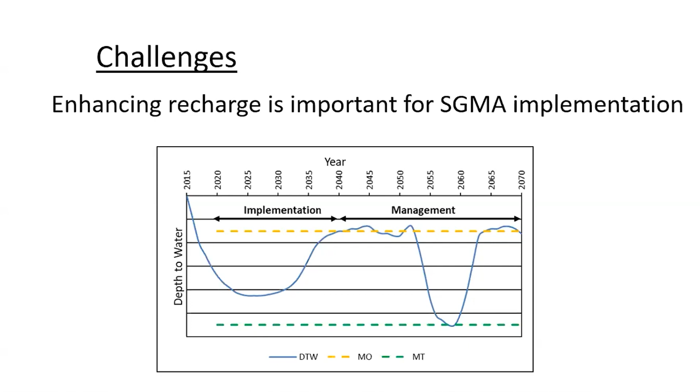And then there may be periods in the future when there's drought where water levels will decrease again and then have to be brought back up to that measurable objective. And enhancing recharge is going to be really important to get those water levels back up there. So that's some of our interest in managed aquifer recharge, is to help with SGMA.

So review of the groundwater sustainability plans generally shows that the smaller subbasins, and maybe some of those are the medium priority basins, have smaller groundwater budget deficits. Some of them are less than 10,000 acre feet per year. And on the other end of the spectrum, some of the large critically overdrafted basins can have more than 100,000 acre feet per year groundwater deficit at the beginning of this implementation period. And those numbers are projected to be even larger if you factor in the effects of future climate change.

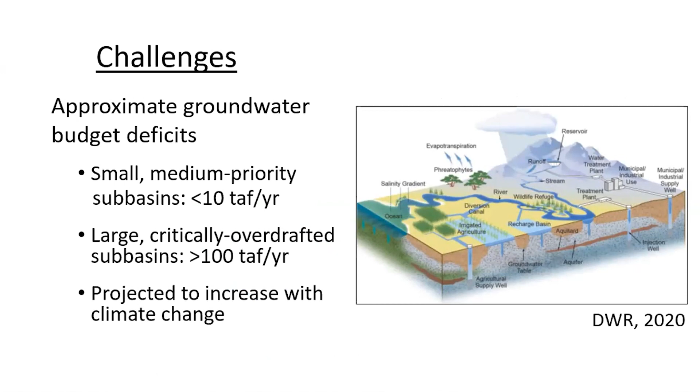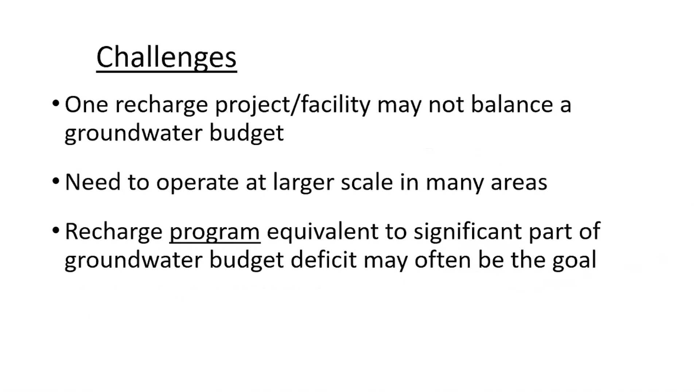So given the size of those groundwater budget deficits, one recharge project or facility probably isn't going to balance a groundwater budget. And you're going to need to think on a larger scale and operate on a larger scale in many areas, and think about recharge programs instead of projects that are equivalent to a significant part of that groundwater budget deficit.

Not surprisingly, appreciable amounts of water and land are going to be required. And there are going to be some other resources and assets and considerations that would be required as well, and we'll get into some of that in a minute. But one party may not control all of the components necessary for success. And interests and concerns among those involved parties likely are going to vary and maybe even conflict in some situations. And this next slide will give you a little bit of a sense of what I mean.

So success for a MAR project or program is going to depend upon aligning the parties' interests and considerations. And there are going to be many of them. Here are some potential examples: water needs, land uses, infrastructure commitments, regulations, and jurisdictions. And you're looking for that sweet spot, that overlap, where you can satisfy all of these needs.

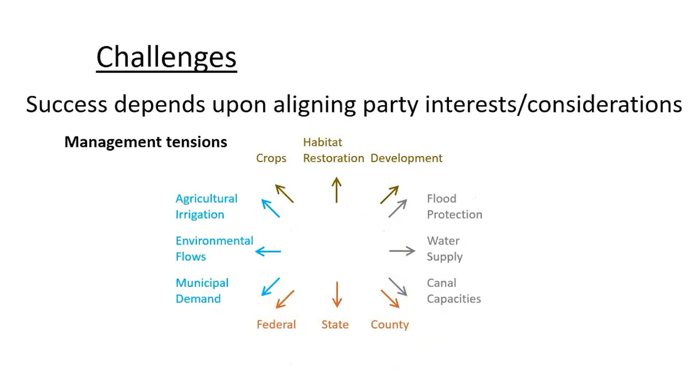So there are going to be management tensions as a result. There are going to be different demands for the water and for the land and for uses for the infrastructure, and maybe a variety of jurisdictions and regulations that have to be worked through. So multi-benefit projects is sort of the holy grail of many of these MAR programs, where we're looking for a way of sort of holistically looking at all of the needs and aligning the interests.

So the idea with a multi-benefit project, and I should mention that Gary Bardini and Tim Washburn from SAFCA have spoken about this concept in this area at length. We might be able to talk about more of it during the Q&A period. But the concept in general, or in short, is that within the context of multi-benefit projects, you can focus on mutual interests and arrive at solutions.

So I contend, and many in our group contend, that it's important to seek opportunities to align those interests and motivate participation. And our experience in the work we've done so far shows that the requirements are going to be in addition to technical competence. You're going to be looking for entrepreneurism and collaboration. You're going to want some people that have insights into organizational behavior. So the needs of the team are going to be broader than just a technical skill set.

Some of you may know of Malcolm Gladwell's book, The Tipping Point. He discusses many of the different personality types and the functions that they serve when you're seeking to implement some sort of a project for the greater social good: the connector, the maven, the salesperson. All of these types of people, I think, have a place when you're trying to develop a MAR program.

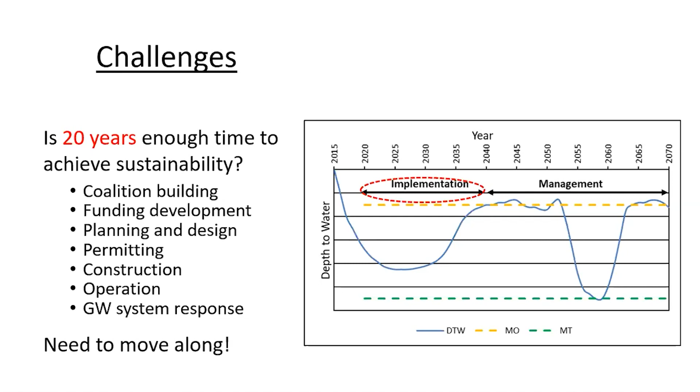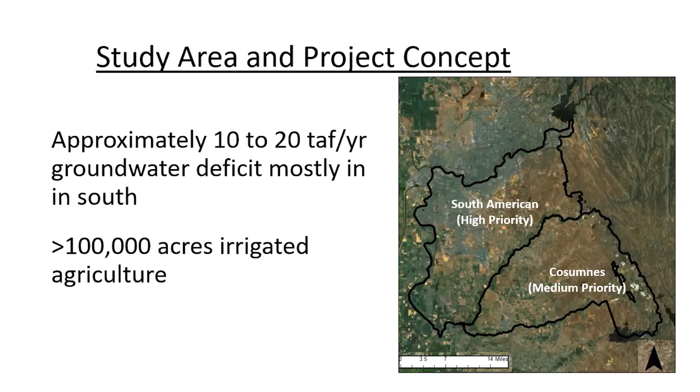So the study area and project concept. So it's south of the American River. It's the South American and Cosumnes groundwater subbasins. Zooming in on it, the South American is a high priority basin, so its implementation period began in 2020, and the Cosumnes is medium, so it's 2022. The groundwater budget deficit is approximately 10 to 20,000 acre feet a year. It's mostly located in the south. There's over 100,000 acres of irrigated agriculture in this area.

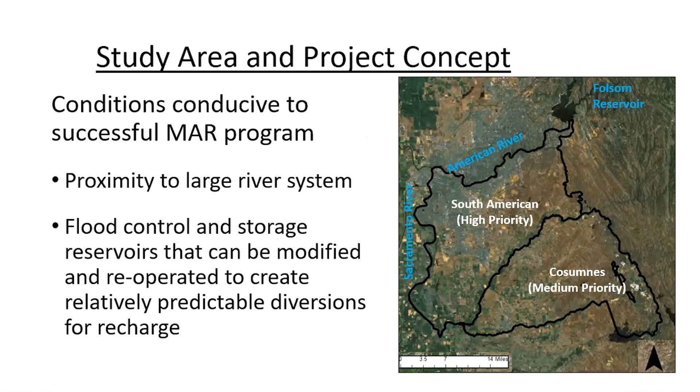And there are many conditions that are conducive to a successful MAR program. The first being proximity to a large river system. The second being a flood control and storage reservoir system that can be modified and reoperated to create relatively predictable diversions for recharge. So there's Folsom Reservoir in the top of this photo. That's part of that system. There's also a canal, the Folsom South Canal, that's capable of conveying significant diverted volumes to recharge project areas.

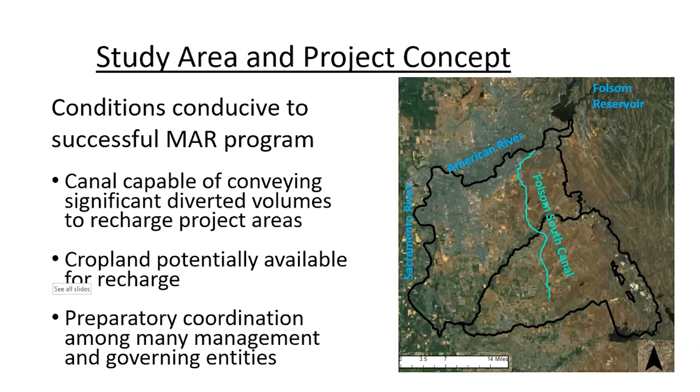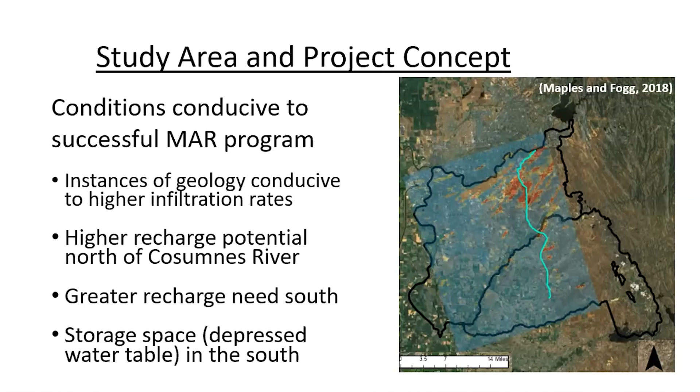But these red areas south of the American River are what Graham has been discussing for many years now, these incised valley fill deposits, in this case, paleochannels from previous courses of the American River. There's higher recharge potential in this area north of the Cosumnes River. The Cosumnes River is the dividing line between these two subbasins. But there's greater recharge need to the south, and that's actually where the storage space is for recharging the water. There's a depressed water table in that area.

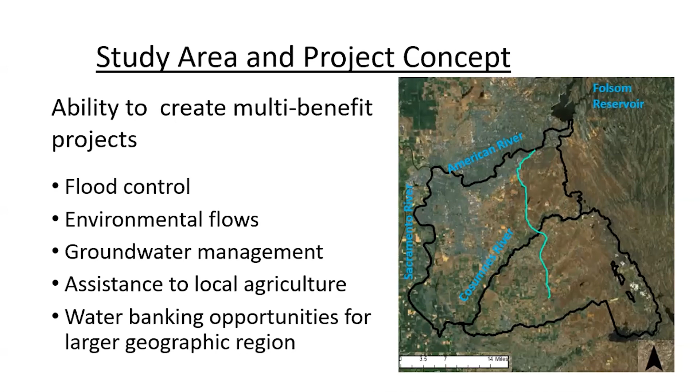There's also the ability to create multi-benefit projects. Some of them are flood control, supporting environmental flows, supporting groundwater management, assistance to local agriculture, and some water banking opportunities for the larger geographic region. Many parties are included. I think I've included everybody. If I haven't, I apologize. So here's one of the acronyms that I'll use today, FIRO-MAR.

So this is a concept that Gary Bardini and Tim Washburn of SAFCA have spoken about many times. The idea is to modify the upstream reservoirs in the American River watershed to provide additional flood storage when extreme rain events are forecasted. So forecast-informed reservoir operation, that's FIRO.

And that will free up space for wet year storage down in the Folsom Reservoir, creating a net improvement in flood control. And then using the Folsom South Canal, that water can be wheeled or conveyed down to recharge areas. Calculations done to date suggest that maybe 125,000 acre feet might become available through this approach in 4 out of 10 years, so an average of about 50,000 acre feet a year.

Considering the recharge projects that we might implement, we need to think about things at a site-specific level. And one thing that we all agree on is that the projects must fit into the pre-existing land uses. So we need to think about the activities and the conditions and what space and timing considerations and constraints they might impose. Then you also have to think about the subsurface. There can be stratigraphy that could impede infiltration.

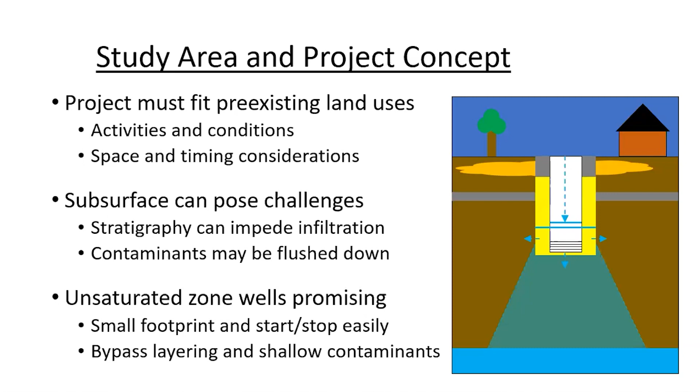The idea here is that the unsaturated zone wells have a small footprint. They can be started and stopped easily, and they can be tens of feet deep. I'm going to show you a 50-foot deep one in a while. And therefore, they can bypass quite a bit of the layering and the shallow contaminants in being effective recharge facilities.

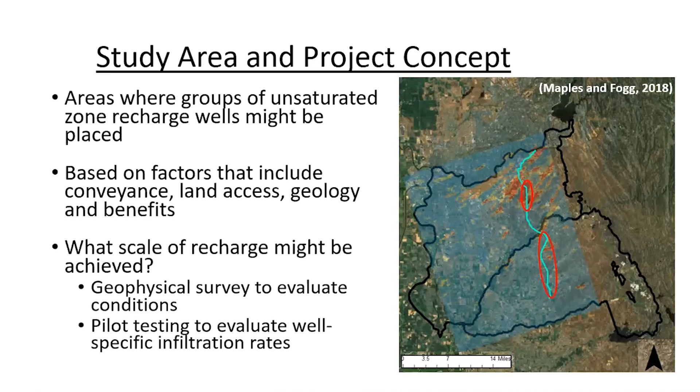So let's look at a couple of sites. As I said, we're focusing on unsaturated zone recharge wells, and we've looked at a site in each of these two subbasins. Site 1 is up in the South American, site 2 is just south of the Cosumnes River in the Cosumnes subbasin. So different approaches at each site based a little bit on philosophy and quite a bit on logistics and funding.

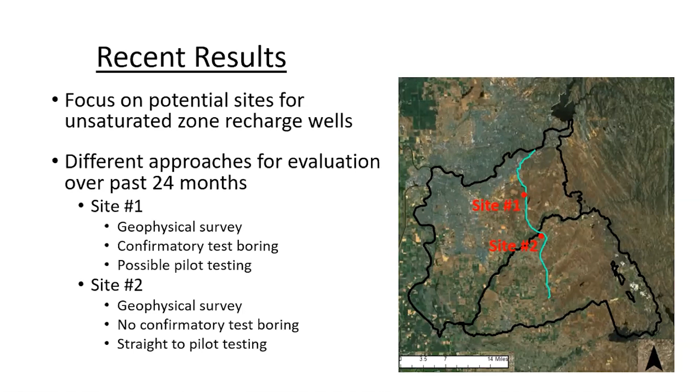So in the first site, we did a geophysical survey, then performed some confirmatory test boring. And we had the possibility of doing some pilot testing that, for reasons that'll become evident, we didn't do. The second site, we did a geophysical survey, didn't do the confirmatory test boring, and went straight to the pilot test. So let's take a look.

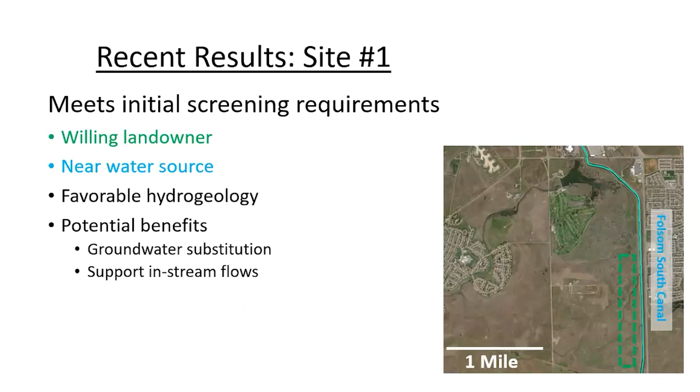So the initial screening was met for both of these sites. There's a willing landowner, it's near a source of water, the Folsom South Canal. The hydrogeology was favorable, and there were some potential benefits to doing the recharge. So in terms of the favorable hydrogeology, here we're looking at some of those results from Maples and Fogg that I flashed up before at a larger scale.

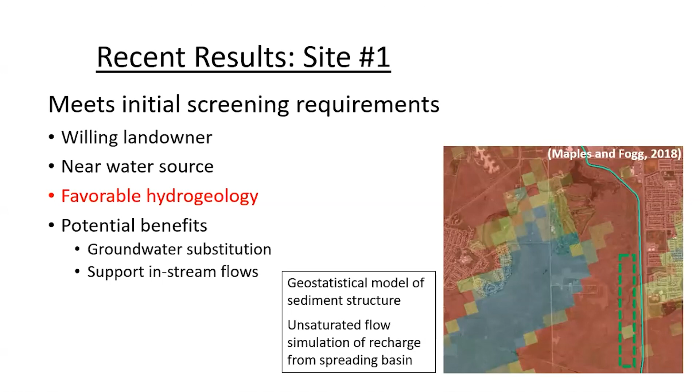Now we're zoomed in. They're based on two pieces of work done by different graduate students in Graham's research group. First, Casey Meirovitz, 15 or so years ago, made a geostatistical model of the sediment structure. Steve Maples then came along and did unsaturated zone flow simulation, where he simulated recharge from spreading basins at the land surface and color-coded the results based upon what he found from that modeling work.

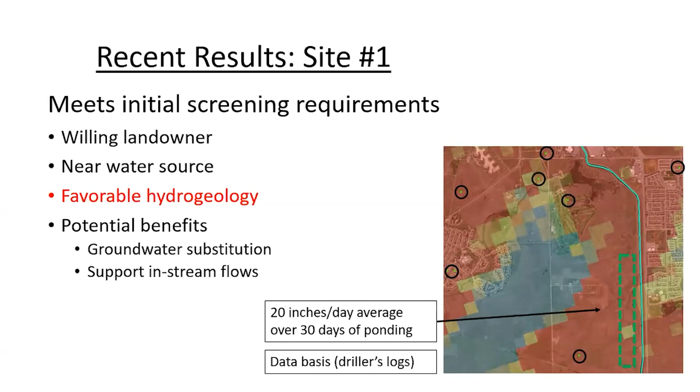So the red indicates 20 inches a day average recharge over a 30-day period of ponding. There's also a gravel pit nearby, so some more favorable indications of favorable hydrogeology. So we did a TEM survey, time domain electromagnetic survey. That's Ahmad Behroozmand on the ATV pulling the instrumentation through this field.

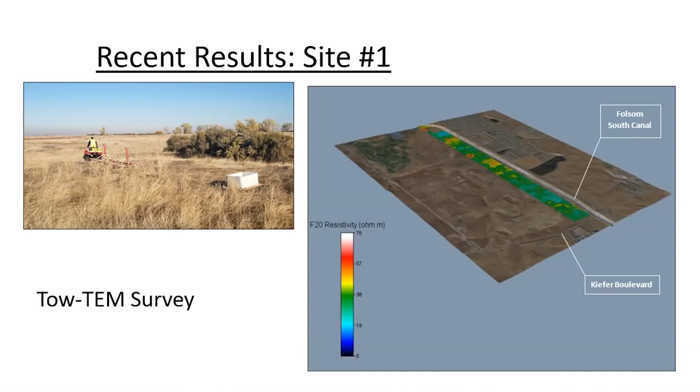And you can see in the right-hand plot here that we did about a 2-mile stretch parallel to the Folsom South Canal. And you'll see some of the other dimensions of it in a moment. But that's what we did. And then Ahmad inverted the data. He did the modeling to interpret the data that came back to give us this block of geophysical survey results.

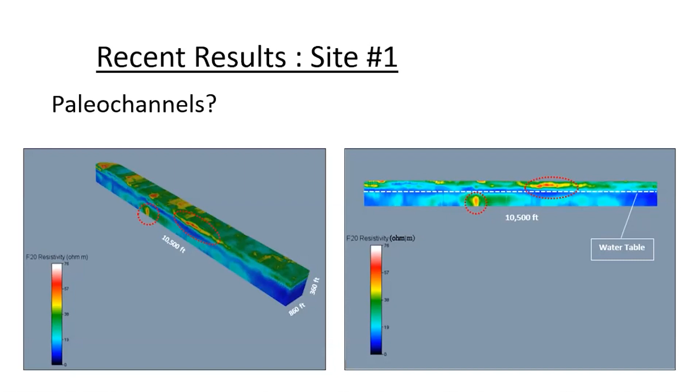And there are these very hot zones, both above and below the water table. More resistive, higher resistivity numbers, these hot zones, can indicate coarse grained sediments. You need to be mindful of soil moisture content and water quality, which we'll talk about in a minute. But we thought, hey, maybe these are coarse zones and maybe they're paleochannels.

So we asked for support from DWR's Sustainable Groundwater Management Office. They have the Technical Support Services program, and they were willing to help us. So we located some test borings in order to sample as much of the variability of the geophysical results as we could. We had some limitations related to site access and biology.

And we were hoping to be able to answer some questions about what are the effects of moisture content in the unsaturated zone, variations on resistivity. What's the effect of the sediment type on the resistivity? How can we interpret this geophysical data set?

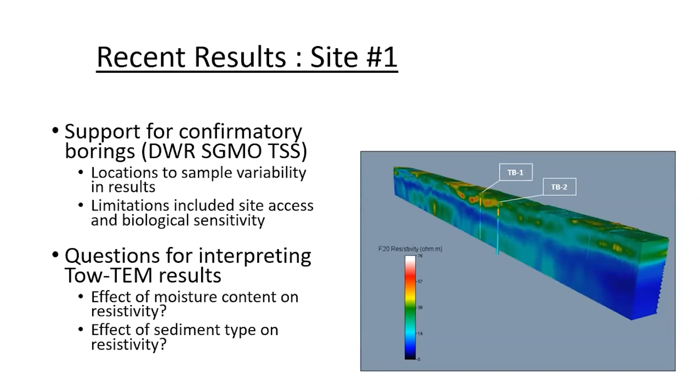So DWR contracted with Cascade Drilling. A sonic rig was brought out to the site for 2 weeks this past September. And we did some continuous coring with a 4-inch barrel. Bryce Russell from DWR did a lot of the logistical organization and then was there on site for 2 weeks doing the coring and the logging of the cores, and Bryce was supported by Bill Brewster, Steve Springhorn, Tim Godwin

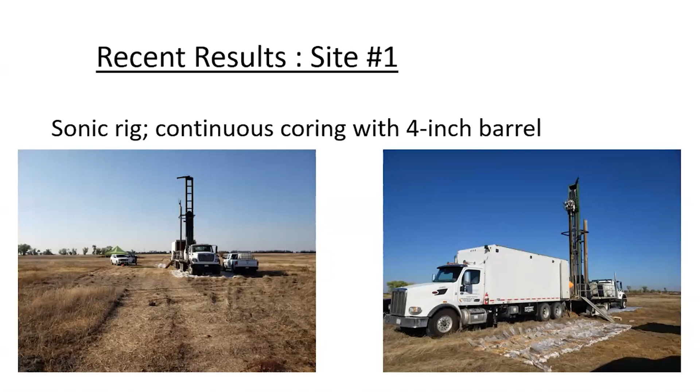from DWR's SGMO office. I spent some time out in the field with Bryce, 1 day on each hole. He was 5 days on each hole in the hot sun. And I wanted to get some familiarity with the logging and the results so that I could take it to the next step and take a look at the facies.

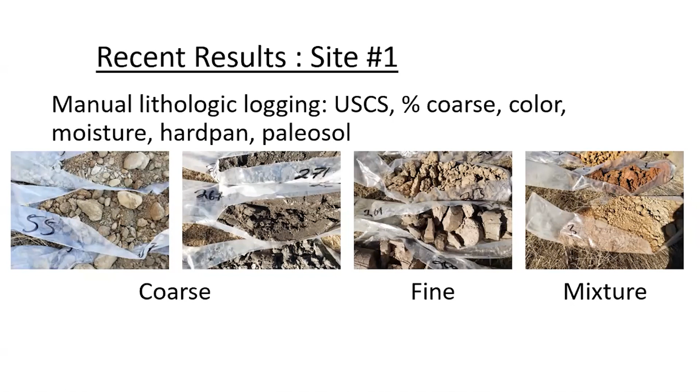But here's another slide about what Bryce did. He manually logged these holes according to the U.S. Unified Soil Classification System. Looked at the percent coarse, the color, the moisture, noted hardpan and paleosol. We then did a preliminary identification of the facies based on the texture and came up with these classifications.

So the channel deposits were the sand and the gravels, high percent coarse, low percent fines. The levees were fines with some sand. The overbanks had no coarse material in them. And then there were these debris flows, which were mixed and poorly sorted.

And here are some plots of the way those groups plot out. So the levees are in brown, so low percent coarse. The channels have the high percent coarse. The debris flows are all over the place in orange, and then the overbank had no coarse material in it.

So then we wanted to correlate the lithology information with the resistivity information. And we noted that it could be complicated for 2 primary reasons. First, resistivity varies with sediment characteristics. Resistivity goes up as grain size goes up. It can go down as moisture content goes up. It can also go down as total dissolved solids goes up in the moisture contained in the soil.

Also important to think about is the fact that there are differences in the scale of the data support. Resistivity is an integrated response in 3 dimensions. The values are for discrete model layers in the inverted model, starting at about 1 meter thick at land surface, and down at depth at 360 feet, they were 8 meters thick. Compare that with the sediment logging, which was one-dimensional but continuous and logged on a 1-foot interval. So different scales that had to be contended with.

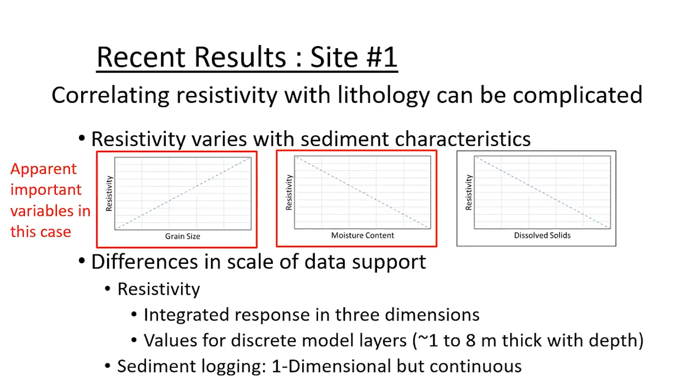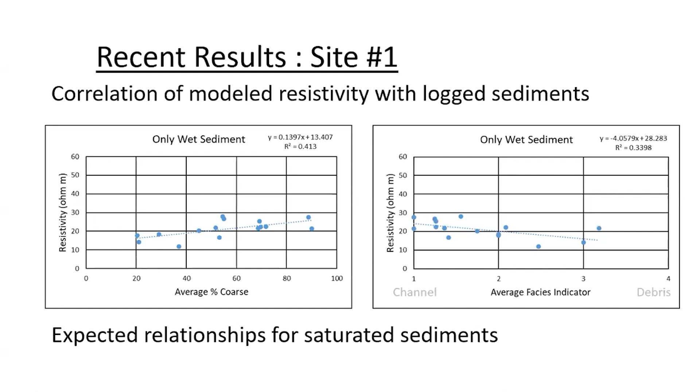Apparently the most important variables in this case with respect to the resistivity were the grain size and the soil moisture content. We didn't think there was going to be much difference in dissolved solids at the scale we were investigating the situation. So here's some plots of resistivity versus percent coarse and the average facies indicators in the saturated zone. And this did what we expected it to do. Relationships are as we expected: as percent coarse goes up, as grain size goes up, the resistivity goes up.

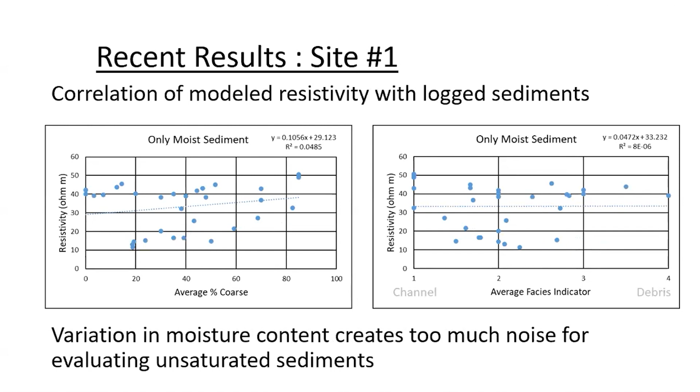Compare that to what was going on in the unsaturated zone, where there's a lot more scatter, and it's really hard to interpret these data. Variations in the moisture content really created too much noise for us to evaluate them. And it's not surprising when you think about the fact we have an 180-foot unsaturated zone, wet and dry seasons, variations in sediment properties. You're going to get pulses and pockets of moisture.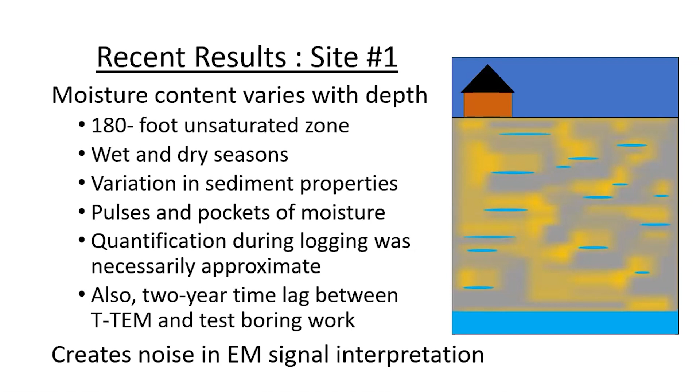The quantification during the logging in the field was also necessarily approximate. And I'm not sure that it would have made sense to try to get any more exacting in the field with respect to the water content, because there was also a 2-year lag between the time we did the tTEM and the time the test boring was done. So if you plot the resistivity versus facies for the wet sediments on the left and the moist sediments on the right, you can see the difference in the scatter in the data.

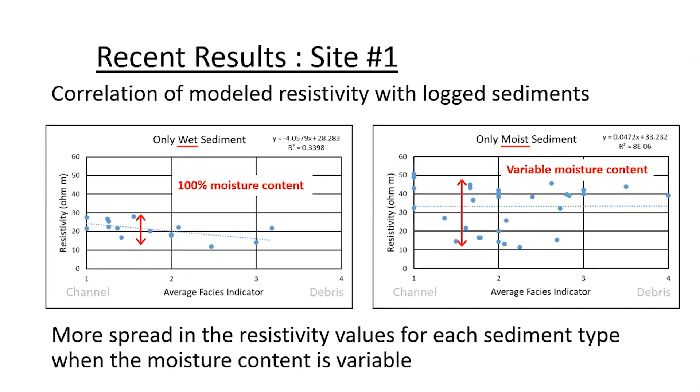We are able to model the resistivity, come up with a correlation between the resistivity and the fraction coarse for the saturated sediments that's below the water table. And if you look, the plot on the right is sort of a typical plot of modeled versus observed values. It looks pretty good, but there's this whole piece of the resistivity spectrum that we see in the unsaturated zone, which is left unaddressed. So what to do?

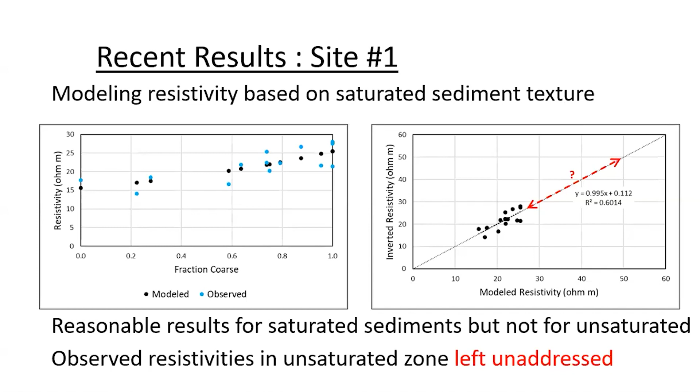Well, visual inspection, some people might suggest it's not that rigorous an approach, but I would maintain that the eye takes into account spatial correlation of similar values. And you can run through various concepts in your mind as you're scanning through a data set and actually do quite a bit. And here I've peeled back on the left the data block of geophysical data to show you the facies identified in the borehole for test bore 1. And then on the right hand, come forward in the data block, and I've put the geophysical data that's most proximal to test boring 2 and its lithology.

And what you see is that these hotter values in both zones, being the saturated zone and the unsaturated zone, line up well with the channel deposits. There are other deposits in there as well, but the geophysics, as I said, and the soil borings are at different scales. So I would maintain that if it looks like a channel, it actually may be a channel.

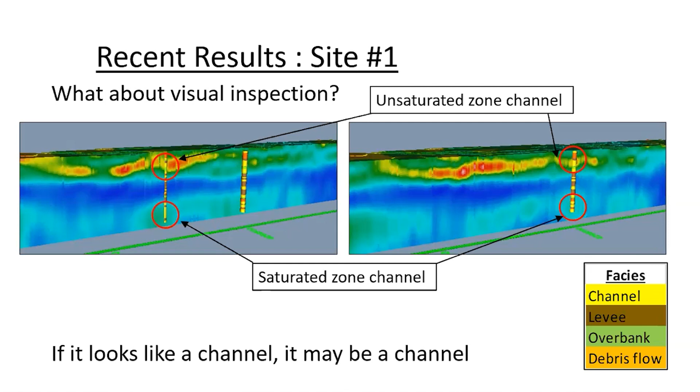Same thing for this impeding layer, this blue layer. It lines up well with the levee deposits as they were preliminarily identified. They may be actually overbank deposits. It was a preliminary identification based just on the texture. And when you think about the spatial extent and the geometry, it's probably more appropriate to call them overbanks. But anyways, we're able to see some things from the geophysics here pretty clearly.

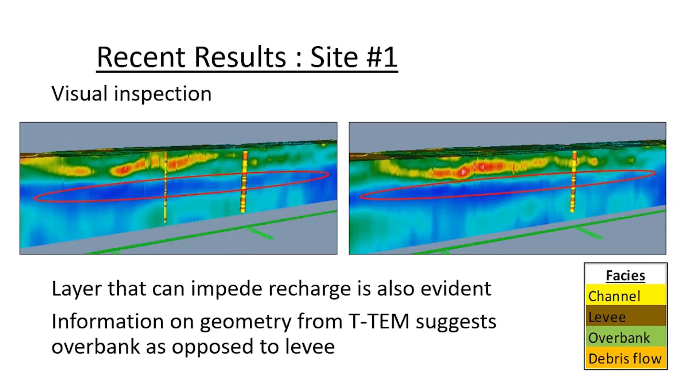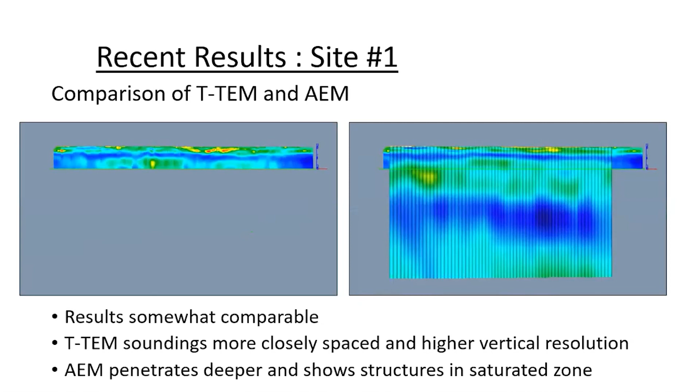Final technical slide for this site. There was also an AEM, airborne electromagnetic flight, that went right through our data sets. We're able to take a look at the two sets of data together, and they're somewhat comparable. The tTEM soundings are closer together with higher vertical resolution. You get more detail in terms of what's going on, but you can see quite a bit of it in the AEM. The AEM, on the other hand, penetrates deeper and shows structures in the saturated zone.

So this site may not be the best for recharge. There's no apparent conductive pathways for fast transmission to the saturated zone. There's also a significant lift to pull water up from the Folsom South Canal at this location. It's pretty well incised into the land surface. But one might be able to factor stormwater capture into the planned housing development in this area. That's something to think about.

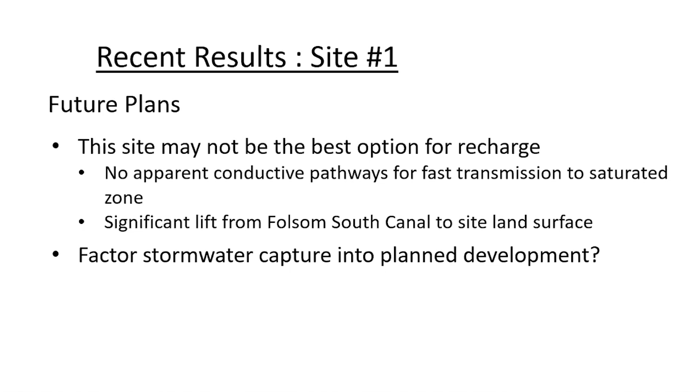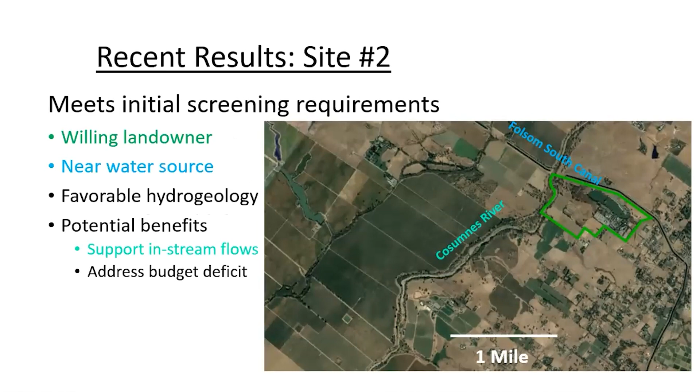Okay, site 2, same idea. Willing landowner. It's near a water source. It's got favorable hydrogeology and also potential benefits, which include supporting environmental flows in the Cosumnes River. We've got the geostatistical support that shows the geology is favorable. We've got our nearby road cut, thanks to Chris Bonds from DWR. He took a picture over on Dillard Road when he came out to visit us in the field one day.

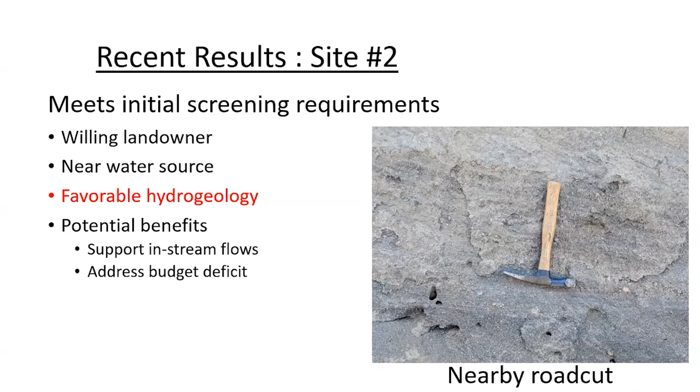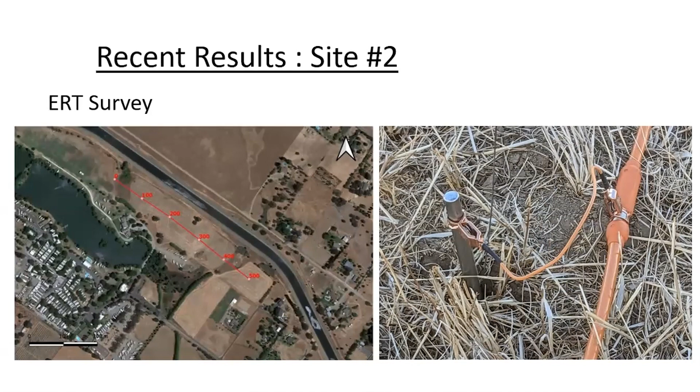So here we did an ERT survey, electrical resistivity tomography. And this was done by Ahmad again, but more recently, Gordon Osterman and Scott Bradford from the USDA are doing some geophysics out here. And here are the results.

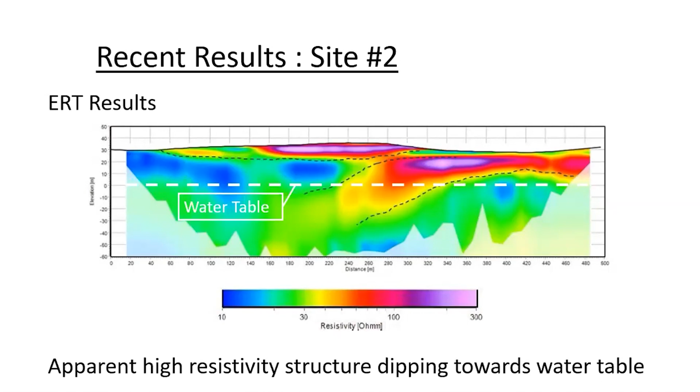Now, this is a log scale, whereas the other ones that I showed were at a linear scale, but the red in the unsaturated zone is the same value. So you've got some good higher resistivity material here, and you even got material that's even higher, that purple zone in the core there. And we see this dipping structure into the subsurface.

So we decided to put a well in here. And Steve Julian and Mike Wakeman at OHWD led that effort. And this is what the well looks like in terms of its construction. It has both an injection casing and a monitoring well casing, both of which are instrumented with pressure transducers.

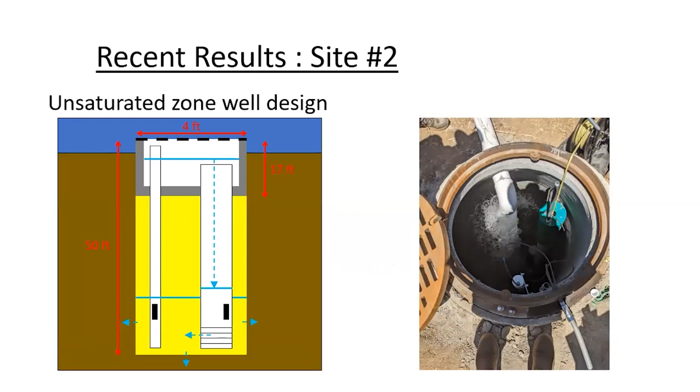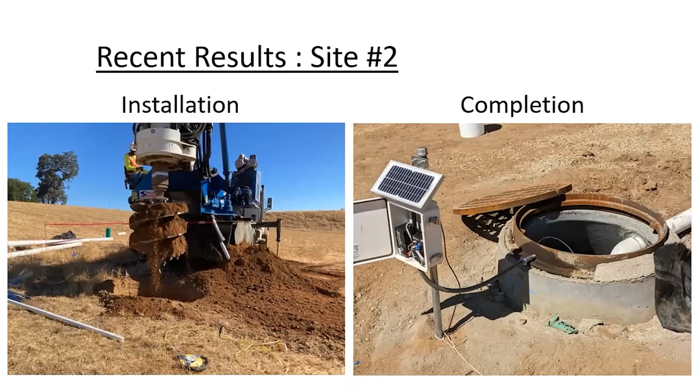Here's the installation, which was done by Travis Pacheco and Torrent Resources team. And then the instrumentation and the telemetry were done by Jeff Walker and Andrew Calderwood and Laura Folia from Larry Walker Associates. We didn't log this hole as it was being installed, but we did look at the cuttings, which were organized from shallowest to deepest afterwards.

And I saw these gold flecks in there, and knowing that this was near where gold was first discovered in California, I greedily got out my best Tupperware and panned out the gold flecks, and they turned out to be pyrite. So no gold for me, but pyrite is consistent with the depositional environment that we would expect here, some channel deposits.

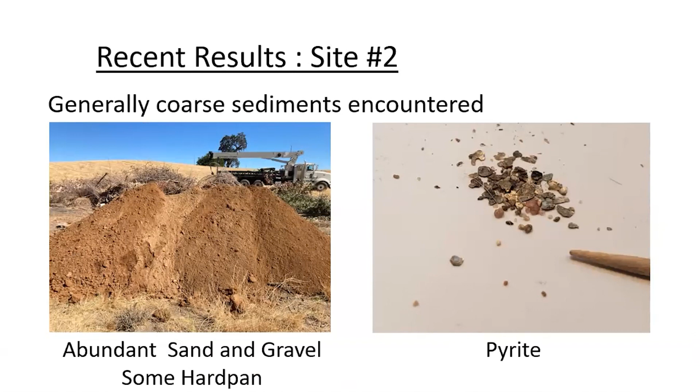So we used a temporary water source. I guess I should mention that this well was never intended to collect surface water because there are prohibitions in Sacramento County for doing that. So that's why the culvert sticks up above the ground a couple of feet. We used a water supply well that's located about 60 feet away and have a transmission line to bring the water to the well, and we recharged it.

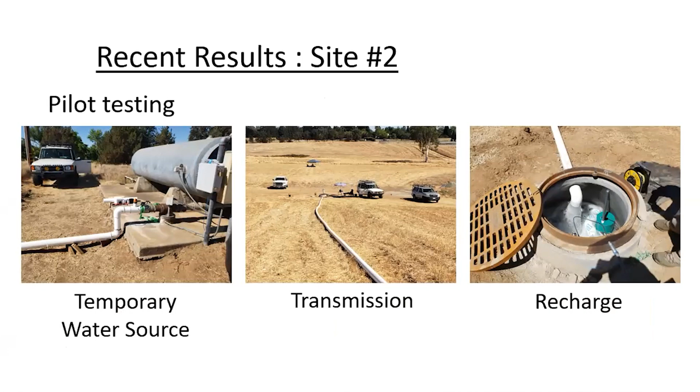And we did a short test at about 380 GPM. And if you had done that 24/7 for 6 months, which is the way we're thinking these wells might be operated, you'd get about 300 acre feet in the ground, and you need about 30 to 70 wells to address the basin deficit. And there was lots of room for additional injection based upon the space in the injection casing.

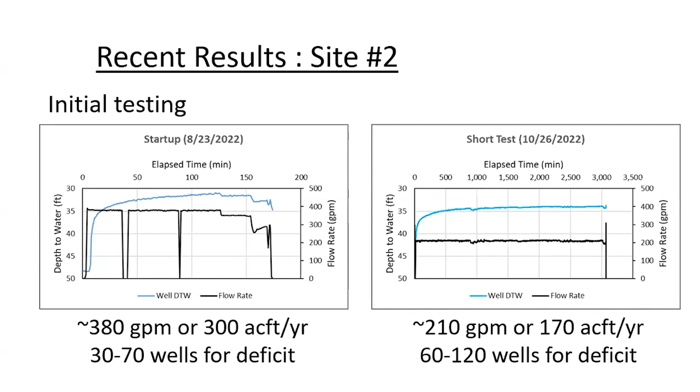Then we did a longer test at a lower rate, but it was lower because we couldn't use all of the supply from the well for 2 days. But again, good results in terms of the ability of the system to take water. And there wasn't much head loss. We have these transducers inside and outside the injection casing, and not much head loss at 380 GPM across the screen. So all indications are we could put a lot more water in the ground here.

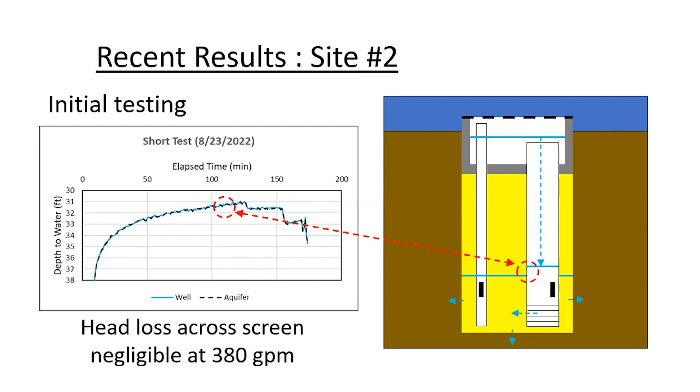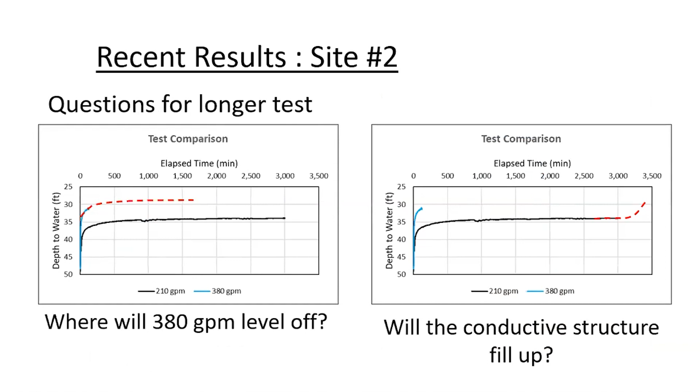We're just not sure how much more. We're not sure where the 380 GPM would level off, and whether if we ran longer, whether it would fill up the conductive structure. We did get a third unexpected test, though. You remember that the levees along the Cosumnes River broke in December on the 31st, and there was a flood. And here you can see the hydrograph.

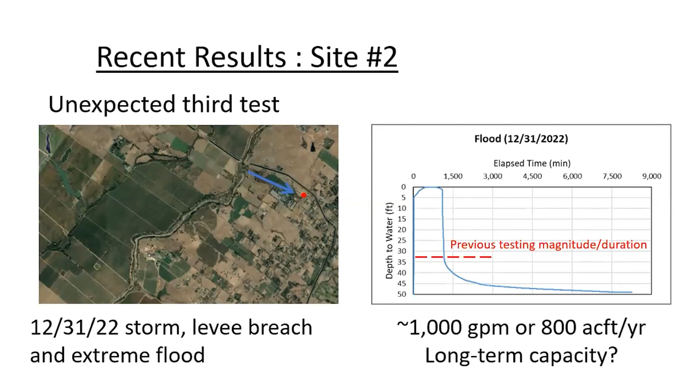I started getting data coming to my phone saying that the well was operating. Well, the injection well was operating, but I had data that was saying the pumping well wasn't operating. Well, that's because it was coming from a flood event. And you can see the magnitude of this flood event and the duration of it relative to the previous testing. My best calculations, I'm still working on this, but I think it was flowing at about 1,000 GPM into the subsurface at that point. So we have these 3 tests that range in terms of the volume of water from 1 to 17 times as much water.

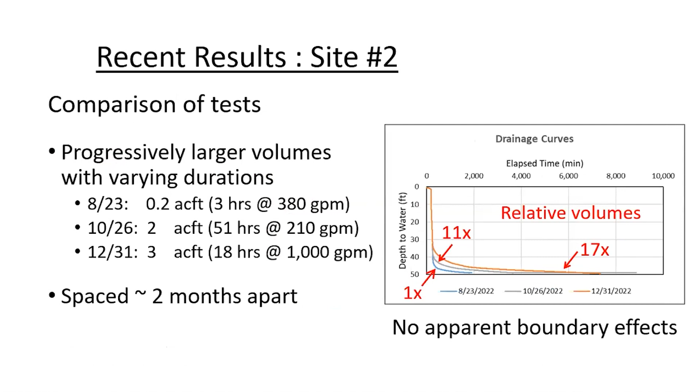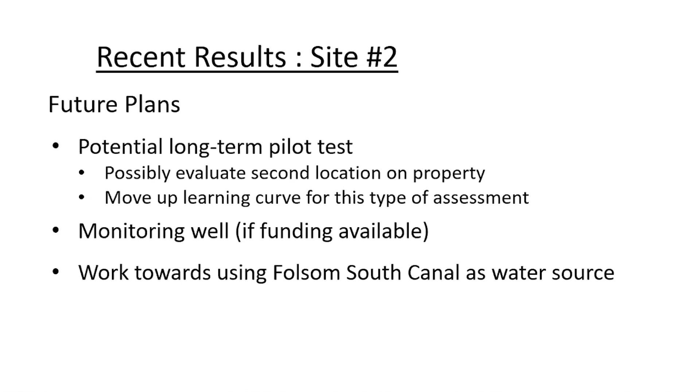And future plans here are to do a longer term pilot test, possibly evaluate a second location on the property, and move up the learning curve for this type of assessment. Maybe we'll get a monitoring well in at the water table to see the mound up of water, if we can get some funding for that, and ultimately work towards using the Folsom South Canal as a water source. So, takeaways.

So far, I've been presenting quite a bit of technical information, but a lot of work has gone into accessing these sites and thinking through how to scale things up. So some of what I have to say is sort of our group knowledge and isn't as technical.

So, first, it's very important to think broadly and deeply about program development. How do you align party interests and motivate participation? How do you overcome challenges, impediments, and meet the varied needs of a MAR program? And importantly, create project momentum. Many suggestions will be made and only some will come to fruition, but it's really important to exercise that marketplace of ideas and maintain project momentum.

Fewer opportunities than appear on the aerial photographs may actually exist because that initial screen is quite tight: proximity to conveyance, willing landowners, compatible land uses. So I'd suggest that you try to make use of every site that may be viable. It's going to take many sites to reach program scale, and not all the sites are going to be perfect fits. So if the hydrology is better than poor, I'd suggest considering using it to add to your recharge program.

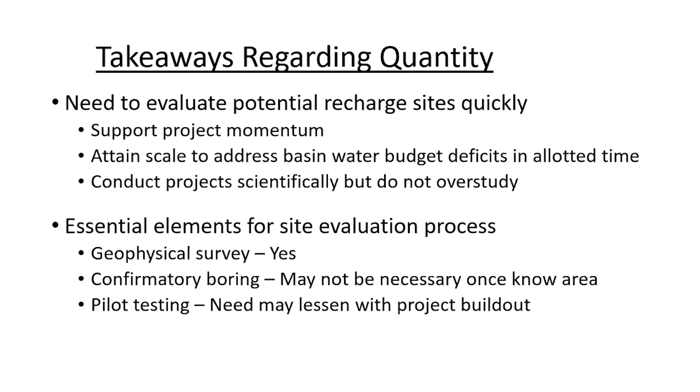So then in terms of the technical takeaway from all the technical information, we have this need to support doing these projects quickly in order to support momentum and attain scale. And I think it's important to do projects scientifically, but not to overstudy them. And with respect to the essential elements for the site evaluation process, geophysical surveys are a must. Confirmatory boring, maybe it's not necessary everywhere once you know an area. And pilot testing is important, but maybe as you move up the learning curve on project build out, the need for that could even lessen as well, as you're really just trying to get to scale as efficiently as possible.

Okay, a couple of comments on water quality. So we're talking about quantity so far. Quality really matters. It's a complex topic. I'm going to give you some thoughts, really just points for beginning a discussion. So there are many considerations. Are some of them going to be exclusive? There are some cases where there's going to be a tension between maximizing quantity and protecting water quality, and there may be some difficult trade-offs that need to be considered. So there might not be a perfect solution.

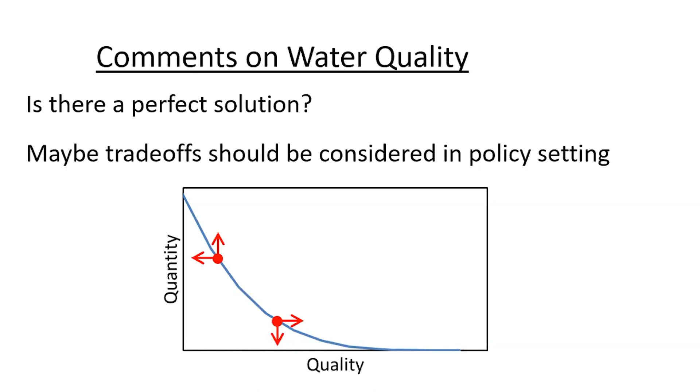Here, if you think about the trade-off curve between maximizing quantity and protecting quality, if you look at a point on this curve, if you go to the left, you could be maximizing quantity by taking as many sources of water, as much water as you can. Maybe some of it's going to have a variety of qualities. On the other hand, you could really be protective of quality and put a very tight screen on all sources of water that you use, but then you're not going to get as much water in the ground. So there's a tension here.

You always have to think about the source water quality. The conditions are going to vary, and timing and hydrologic event might be something to think about. For instance, if you're thinking about surface runoff in an urban environment, you might not want to take the first couple of flushes of water at the beginning of the wet season. That's probably going to have more constituents in it than others.

If it's materials that are adhered to suspended solids, that might be readily addressed. If it's dissolved constituents, but the constituent has a high maximum contaminant level, the water might be acceptable in many cases because the concentrations are low. It's these dissolved constituents with low MCLs, or guidelines even, because they're emerging constituents that don't have MCLs yet, where we may have some problems.

So planning horizon matters. If you're thinking about short-term impacts from washing down legacy contaminants from the unsaturated zone versus the longer-term benefits of doing the recharge, and maybe putting clean water into an area that has water quality that isn't as good or is projected to get bad if no actions are taken. I'm thinking about things like nitrate and total dissolved solids. There's a balancing act to go on there. This is in the realm of policy.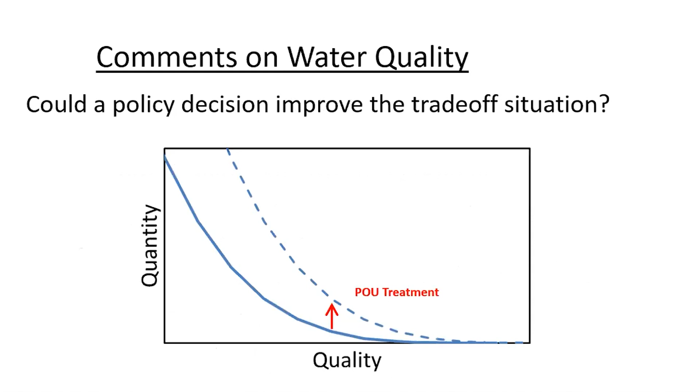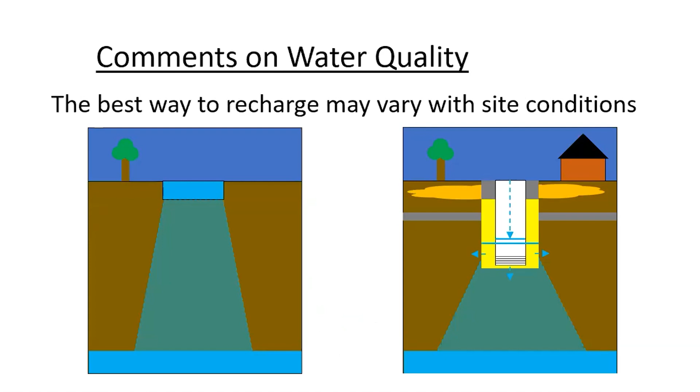There are some concerns. Permitting of this type of a well isn't accepted everywhere, and one of the concerns is injection of untreated surface water. And here, I think the point to consider really might be, what is the travel distance through the unsaturated zone before you get to the water table?

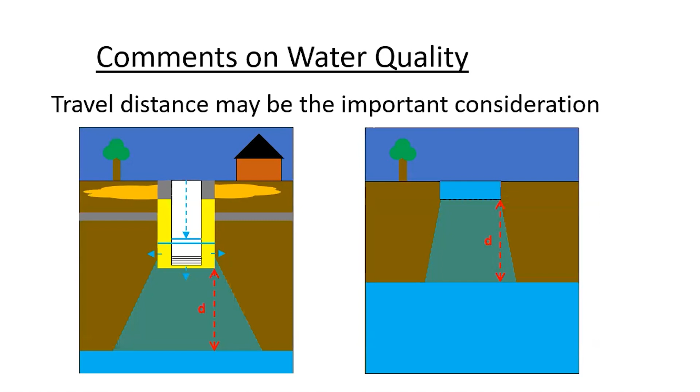So you could have a situation where you have a pond accepting untreated surface water that has the same travel distance to the water table as a recharge well. The recharge well is in an area where you couldn't put a pond. You still have what is considered in the pond instance an acceptable travel distance. Maybe this is something to think about as well. And that's the end of my talk.